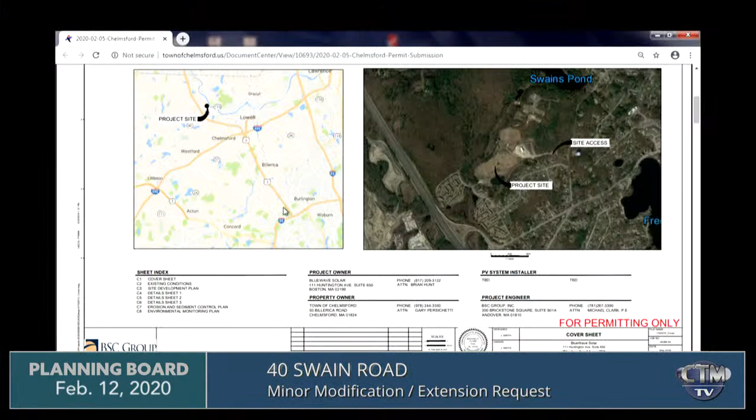I'm here tonight to provide a brief update, a request for the permit extension, as well as a minor modification. The update is just that the project has been progressing through its stages with the utility company, and we plan to submit for a building permit in the next 2 to 3 months.

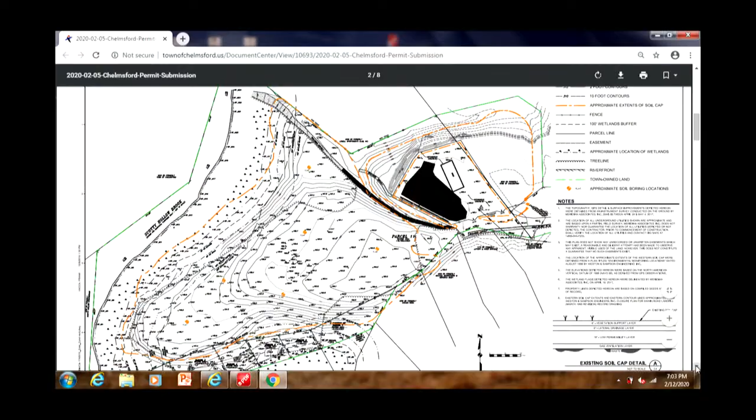As far as the extension goes, it just happened to fall that the special permit was granted in February of 2018, so we were hoping to get an extension. We asked for 1 year, but again plan on filing for a building permit in the next 2 to 3 months. I can answer any questions about that, but other than that, the minor modification, I can go through what that entails. Sure.

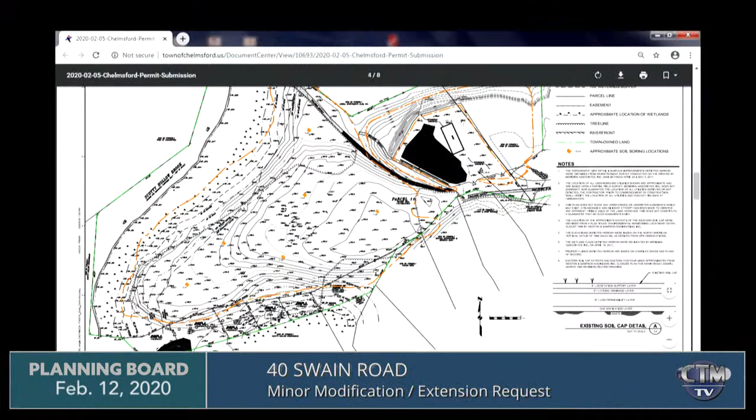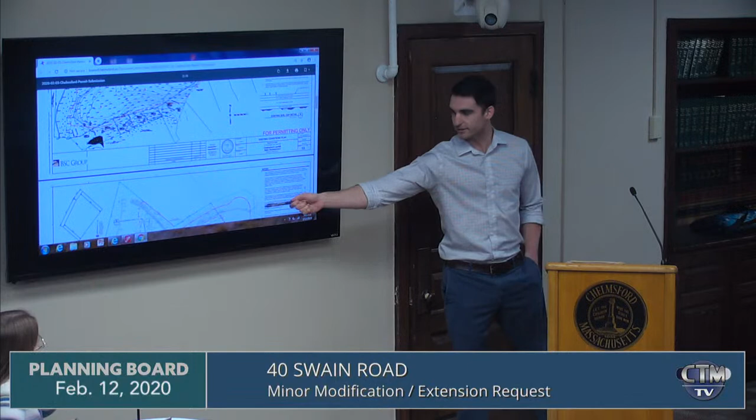If you could please scroll down just one more page here. Nope, I guess back up then. Just to the site plan that has the design on it. Yeah, there we go. Which one, down here? This one, yeah, down here. That is... computer literacy, he has to go home and get his kid. Ah, there we go, I know what that's like.

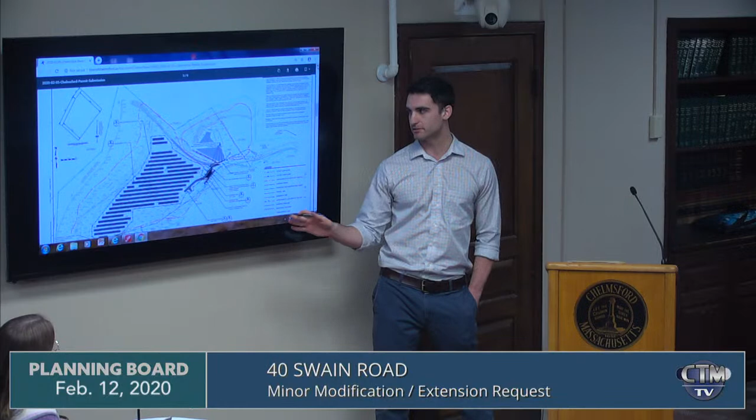So this project was permitted in 2018. When it was permitted, solar panels weren't quite as efficient as they are today. So one thing that entails is the module count has not been changed, none of the positioning or fence line has been changed. We were just proposing an additional or expanded pad for energy storage, and the modules will now be a higher capacity, but the footprint and all those features remain the same.

That sounds simple enough. Yep. You're still within the same layout, the fence there, that could be fine, I think. Exactly. Cool.

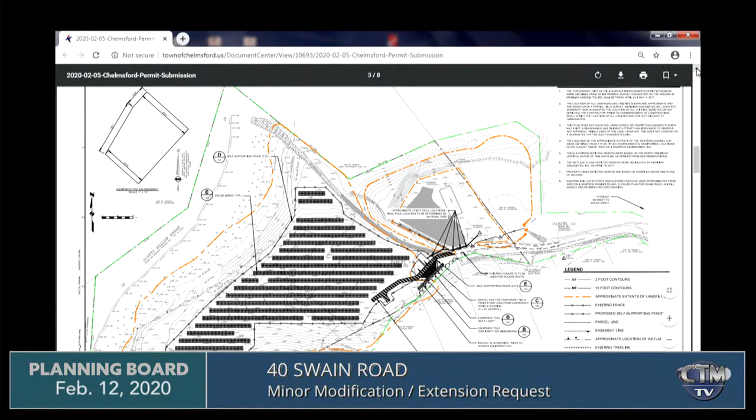Just out of curiosity, what's the projected power output of this thing on a bright sunny day? So with the 400 watt modules, we have the DC size - it's about 1.5 megawatts DC. And then each kilowatt is expected to produce about 1,300 kilowatt hours.

Anybody else got any questions? Simple enough, have at it. I would move that we grant the minor modification and also grant the one-year extension on the permits issued up to date. Second. All in favor? Aye. Good luck, thank you very much. All right.

235 Littleton Road, review of the decision and sign the decision. Everybody kind of read it and looked over it? I wasn't here, so I can't. Okay. Everybody good with it?

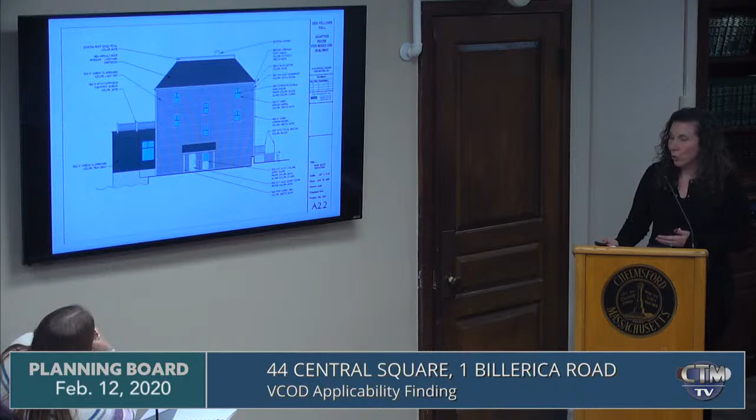This is the rear of the building. It would have a door that would go into the restaurant service space, and also a door that would go up to the apartments.

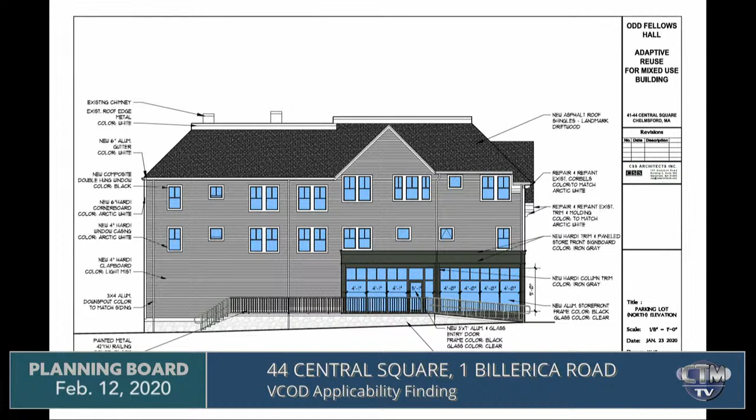This is the side that actually faces the Fisk House. This would be the main entry to the restaurant, and the sign band, as previously shown on earlier drawings, would wrap around to the side here.

The proposal is to create a sign band similar to the old one with the gooseneck lighting, which will have all of those details as we move forward.

This would provide a ramp both from the center of town, so you could walk up the sidewalk that's there today and ramp up to the side elevation here. It also provides a patio space for outdoor eating, and as you go to the back of the building, it provides stairs down to the rear parking lot, adjacent to the new accessible parking.

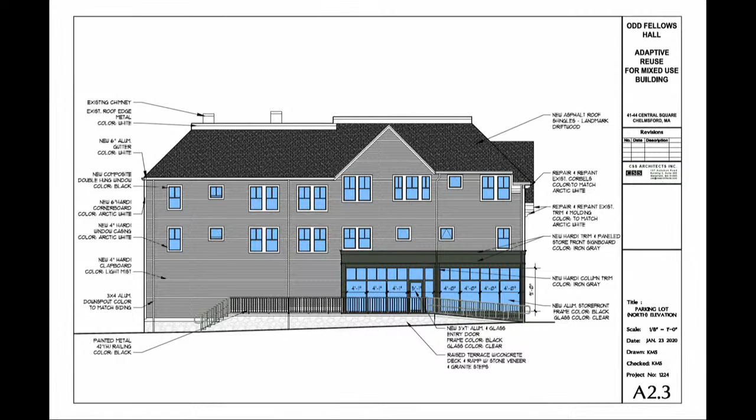This is the other side of the building, where I guess people call it the addition. This will also be two dining rooms that would overlook Beaver Brook.

This is just a conceptual interior of the first floor of the building.

Moving toward the back of the building, one of the things we wanted to do was really stress where the location of the multifamily building is. There's been a lot of concern about the view shed, and I have a lot of pictures to show you as I bring you through that. I'm probably going a little overboard for applicability, but since we already had it done, I figured it's necessary to get as much information out as possible.

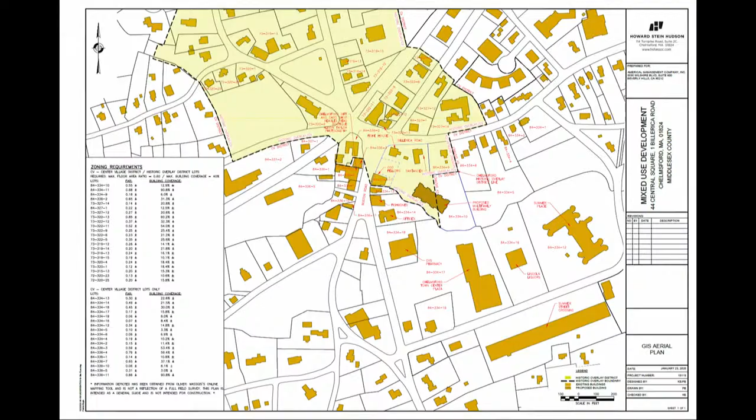So in this drawing, this is the new structure here, and this is the historic district line. This building is actually in this location also—you just can't see it because it wasn't updated on your GIS yet, and I didn't move it over there.

Essentially, the new building is really tucked all the way back into the back parking lot, within the limits of work and within the limits of pavement that are there today. It's actually just about the same distance off of Central Square, Boston Road, as the grist mill is—pretty much exactly the same distance as the grist mill is from the road. It's also about 220 feet from Billerica Road and behind all of those buildings, and we did that on purpose.

But we had a lot of feedback from the historic district. We worked with them for, I believe last Monday was the 5th meeting. So we did a bunch of informal meetings with them just to get some feedback, figure out where we needed to get to before we filed for appropriateness.

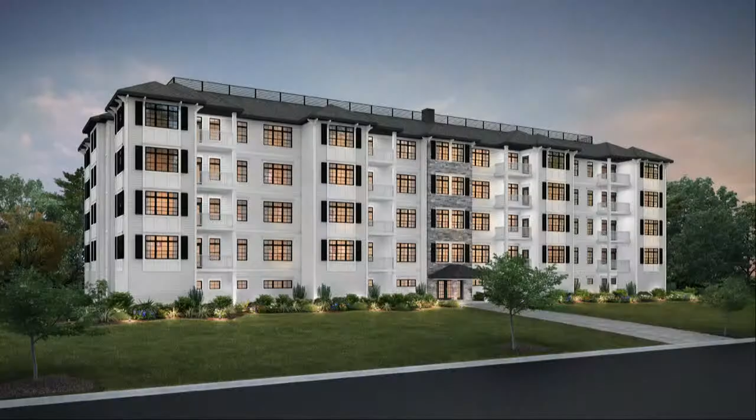This is the building that was approved by the Historic District Commission. So you can tell it's pretty substantially changed, and it's kind of bright on this screen here, but essentially what we've done is it's all horizontal siding, all light in color.

Crossbars in the windows go all the way to the bottom. There's shutters on the protruding sides. There's a peaked roof, screening on the top of the roof, and the stone that runs up the center.

What's different about this building than the grist mill, though, is we are in the floodplain. So the first floor, or the garage parking, which is underground on the grist mill, which you see from the Cushing Place side of it, you will see. So this first floor is actually our parking garage.

That's because the floodwaters have to be able to come up outside of Beaver Brook and in the 100-year event, 100-year floodplain, be able to move into the garage space. So essentially the 4 floors of living is over that.

So the view shed from Cushing Place is essentially the same view shed, although lower in the ground, that you would see here as you drove past the Odd Fellows building and looked 200 feet to the back of the site. This building is very similar to the grist mill.

Again, this is the garage end here, which you would see. We positioned it in such a way so that the view shed was really limited, and I'm going to show you a little bit more about what I mean by that, but essentially having it parallel to the brook, we're able to really cut down on the view shed.

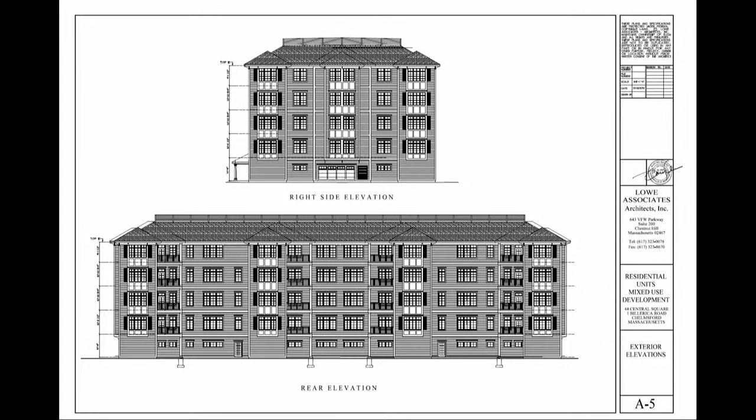Also, the property is 7 feet lower at the back of the site than it is from Boston Road, or the center of town. So it's actually 7 feet lower than in front of the Odd Fellows building. It's actually 13 feet lower than in front of the Santander building. So that first floor is essentially lower than the center of town, even though we can't bury it because we're within the floodplain.

We did do a balloon test on a very cold and very windy day and had a site visit the next day. Mike Walsh was able to join us. We did take as many pictures as we could before the second balloon hit a tree and burst.

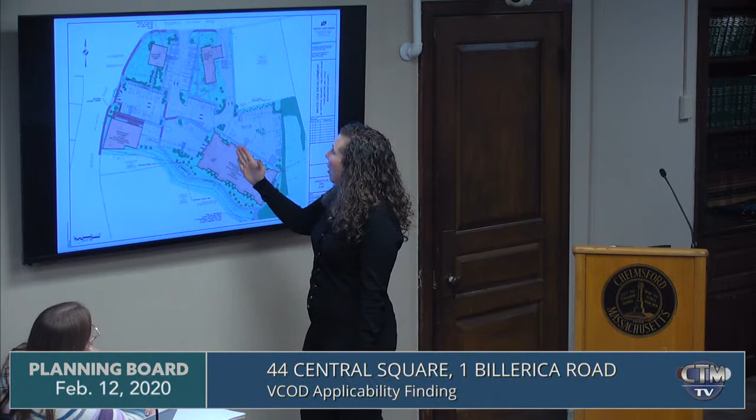If you're looking back this way, you're going to catch the side of the building. If you're looking down, essentially out, you're going to catch the front of the building a little bit. But the view shed is pretty limited. This is wetlands here, and this is Andiamo right here, and Fishbones is up here.

So other aspects of the site plan that we've developed—I want to make sure you guys can hear me. We've also met with Center Village, and we've read through the Center Village plan, and with the experience of Gristmill, we are providing a brick walk.

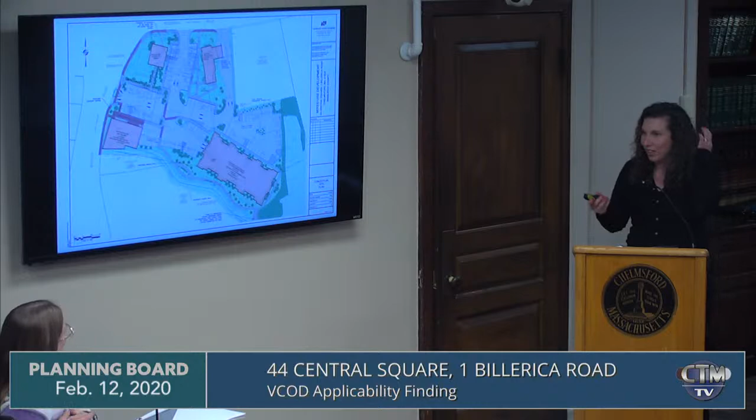The brick walk would connect, because even if we took the addition off the building, the property line basically touches the building at this corner, right here. So even if we took the addition off, we couldn't get the brick walk by, and we're not really sure how we would even do it topographically.

So essentially, we're crossing the road in front of Artisans Exchange. We're coming up past Oddfellows. We're going to take a right onto the new brick sidewalk along the patio. You're going to pass the Oddfellows building. You're going to take a right through the parking lot and basically get on the brick walk.

And what we're doing here is looking for a similar treatment to what we did on the Gristmill, which was compacted crusher fines. Because the pavement isn't this close to the brick today, the only way to do it this close to the brick would be to use a pervious material. So we're looking at doing it in a pervious material. If it can't be pervious, then we're going to have to shift the walk back essentially into the existing edge of pavement.

The project incorporates pretty significant green space. We're actually providing 3,000 square feet more green space on this than the current way this lot stands today.

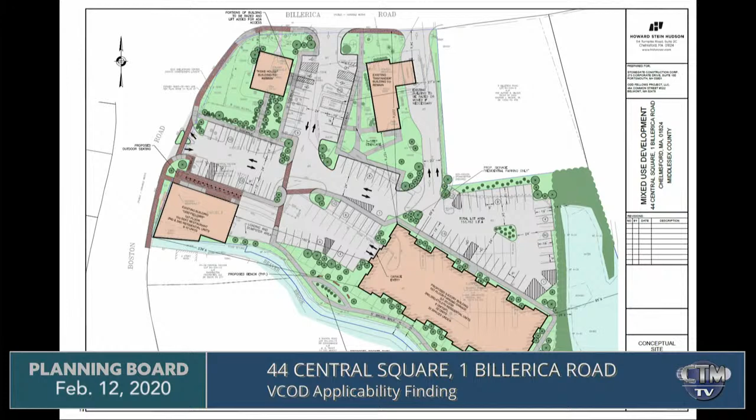Certainly we would provide an easement for the brick walk. We're looking at providing a pocket park, or a place to rest off the brick walk. We've talked to Center Village. There's benches and lighting forms that have been approved in the Center Village that we'd look to incorporate here, very similar to what we incorporated at Gristmill. And basically provide those easements for future connections across the brook.

So we're looking at basically extending that to the entire length of the property as far as we can to get past the building. All of our interior pedestrian connections connect around the new proposed multifamily building, connect to Oddfellows, to Fisk, to Santander. And that's to provide a cohesive plan. Essentially, this plan works as one plan because everyone needs access, everyone needs parking, everyone needs to be able to.

We provide each of the uses adequate parking per the zoning bylaw, but if the bank closes at 5 o'clock, there's no saying that the people who are at the restaurant, if there's overflow, can park over there. If the office space closes at 5 o'clock, the people from the restaurant can park over there.

We have 2 spaces per unit for the multifamily, and 1 per 5 units for visitors. Multifamily is not allowed the reduction in the Center Village that other uses are required to have, so all of the residential aspects of this meet the bylaw 100%. The restaurant and commercial aspects, the office aspects of this shall be 50% of what's required, and we have 3 spaces in addition to what's required by the zoning bylaw.

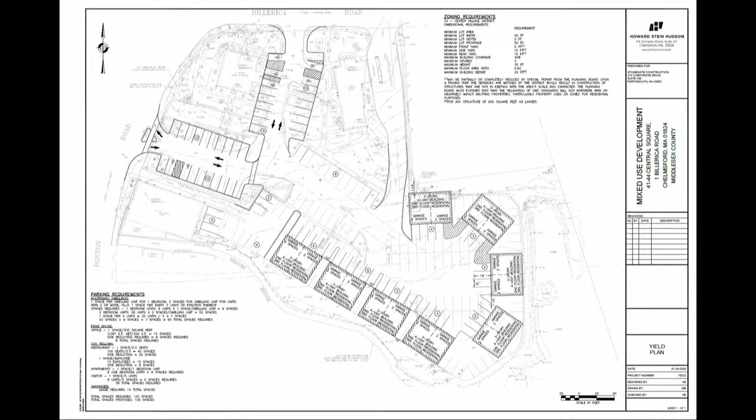So essentially this is the yield plan that we hope meets your requirements under kind of the new policy of the planning board to show the density. Certainly the density is well within the area calculation you would do. We have 3.5 acres here, so we only need about 54,000 square feet to do 32 units at 5,600 per 2, plus 1,800 per every one thereafter. But we're not looking to do that here.

We will be having to go, certainly we'll come back to planning board with a full package - Conservation Commission, Historical Commission - and we have to go back to Historic District Commission because they want to see all the other elements of the site, which we've yet to develop. So we're here tonight seeking applicability under the VCOD so that we may get to work on those details.

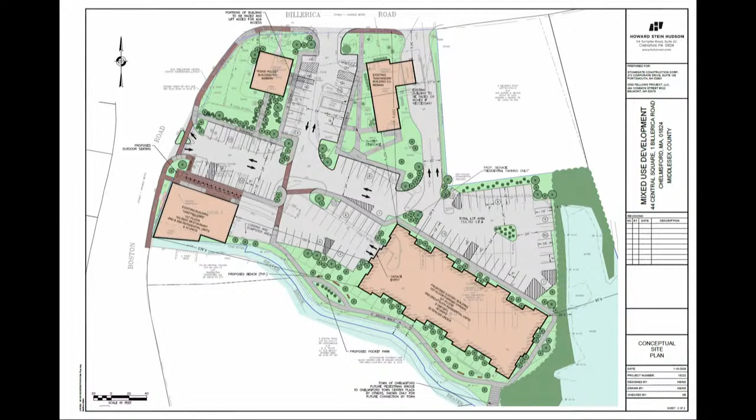Very good, I think that's it. All right.

With that being said, anybody want to chime in? I'd like to just throw one comment in.

We've pretty much gone through everything that is here across the street on the other one as far as the applicability part goes. It's basically the same thing, just keep in mind we've already done it once, so I won't rehash it. Why reinvent the wheel?

Well, anybody else want to chime in? Go ahead, chime in. I don't have questions, but I do have a comment.

First, I'd like to commend you on a really nice layout and reuse of these historic buildings. It's incredibly appreciated that your 32 planned units take into consideration the historic nature of the district.

My one comment would be that I'm not seeing where a 5-story building with 1 story underground is the same thing as a 5-story building with all 5 stories above ground. I probably won't be inclined to go with 5 stories above ground, but other than that, it looks great.

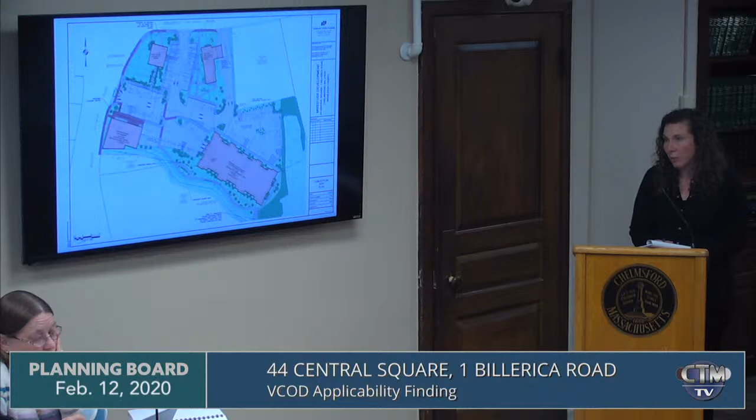We'll have to provide cut fill calculations to the Conservation Commission and DEP related to the fact that we're not filling anything within the floodplain and pushing the water somewhere else. We're also going to upgrade all the stormwater, and we're not allowed to put living spaces down there. We'd look to incorporate flood vents and the like. There will be vehicles down there, and people will be notified to move their cars during flooding events. We've done this before.

Okay, it's just new to me, so just seeing that piece of it. But I think I like the plan, it's great, it's a good utilization of existing buildings, and it's awesome. Just concerned, my concern for the next phase is the parking. How are we gonna solve that issue?

It came up at one of our last meetings that the town is at capacity on the sewer line, Evan, so I don't know how that plays a role in this development as well. Those are the only concerns I have written down here, and you've addressed a few already. Otherwise, I think it's a great project.

Thank you. I gotta say, I think it looks pretty good. I have some of the same concerns about height, I think we're learning from the last several projects that there's a sensitivity to the height of these things. We can talk about that, but it certainly strikes me that this is within the VCOD, and at this stage of the game, that's the important consideration.

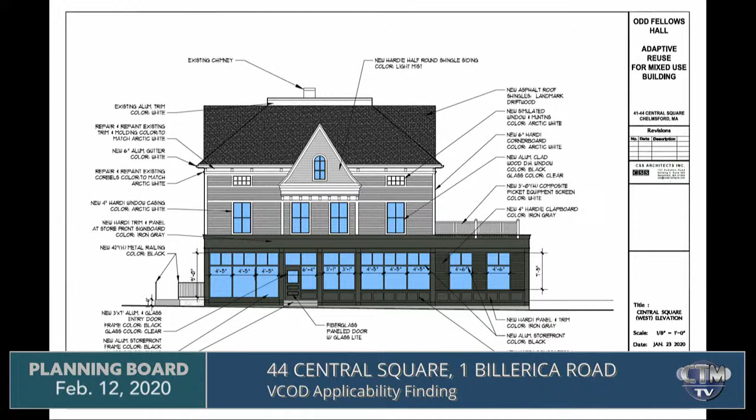It says 1900 on the assessor's records, but the architect would know better. Yeah, I think it's a little older, I think it just says 1888 all over it.

So that's nice. You might want to do the same thing on the building in the back. However high it winds up being, you could probably do the same thing there.

Parking's going to be the big issue. We're going to be talking about that tonight a little bit later. That's a bigger issue than just this project, and I think we all recognize that. We're going to have to figure out how we're going to park all these folks. I gather you're not really changing the amount of parking, you're just moving a bunch of it underneath. Is it about the same total? We actually have more spaces, maybe 7 more than today. So you're in the same ballpark, but I'm glad you were able to expand it a little bit.

I hate to see that little building behind Fisk go, but I'm not sure what on earth it's useful for.

You can move it over to my house. I might just, if you could pick it up, I might take it. Okay, that's it for now.

Tim? Just like the rest of them, I like the design of it. One of the only concerns I think too would be the parking. I don't know how you're gonna fit all the cars down there if the restaurant's full and everything else is full, but as far as applicability, I think I'm fine with it.

Hank? Yeah, I'm fine with it. I'm glad you breathed new life into the Oddfellows house. That's big. I'm sure we're gonna figure out the parking, and the town's gonna look at some of those few parcels in the center. But my only concern is the traffic, and I'm guessing it's gonna be the same as Gristmill, like a couple hundred trips a day, or?